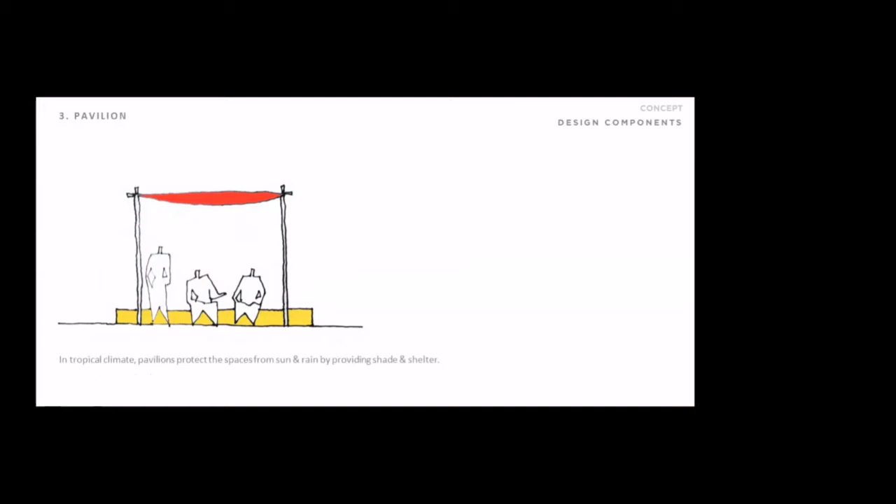Going ahead, there are certain amenities as well as certain principles that we formulated. One was the facility should be easy to use and convenient for all age groups. It should be durable and require less maintenance, meaning it should be easy to clean, with very minimum joints in the materials we use, because creating more seamless surfaces makes it easier for the cleaning staff to maintain the facilities.

The next is adaptability and the replicable nature of the unit. The designs should be adaptable to various spaces, because in such projects it's not like an individual house or bungalow where you're given a site with the luxury of setback areas. In cities you never know what kind of spaces you'll get to build in, so your designs have to be adaptable and at the same time replicable, and could be modified based on site conditions.

Then the fresh and soothing ambience, signage in braille for the specially abled. Care should be taken for the handicapped as well as the blind, so they can access the facilities.

And sixth, it should add value to the city. If you see around, most public toilets don't add value to the city. Whenever a public toilet comes up, that corner becomes like a no-go corner, or people neglect that space. But in fact it should happen the other way — the moment such a facility comes in, the space should get enhanced with a lot of these activities.

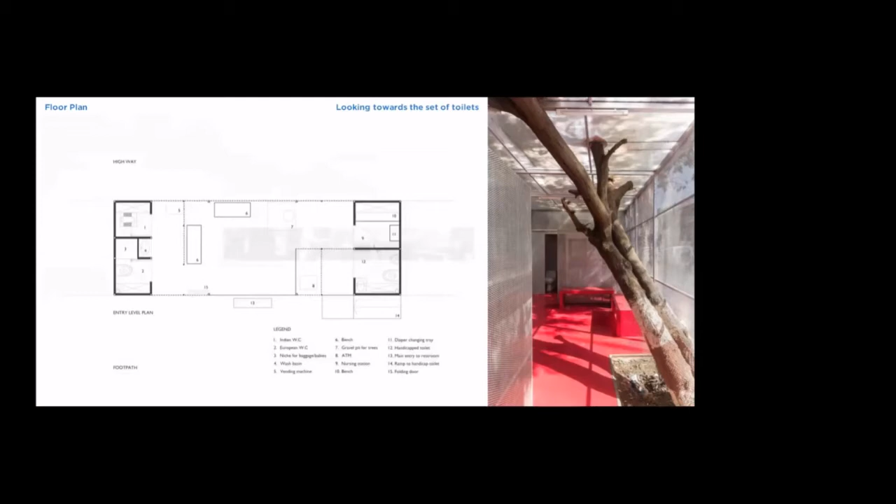For the methane gas, one has to run a pipe at the roof level because methane gas is combustible. It might be prone to some explosion if it's interacting at a human height level or a height lesser than that.

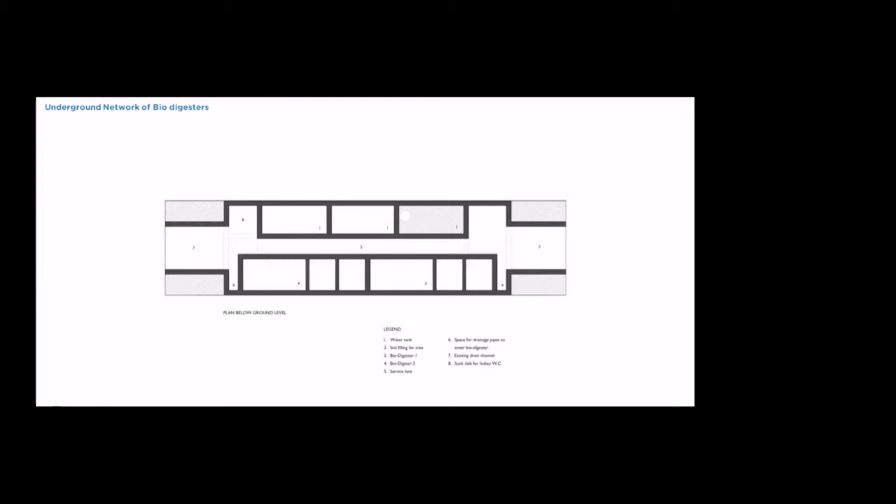This exercise was important because I spoke about optimizing the construction, because these projects are on a really tight budget, and we wanted to optimize each and every inch that we consider for building.

If you see this section, this study, what we have done is 7 feet 6 inches is where the height goes, where the hand of the guy reaches.

Then we have 2 options - one is 9 feet 6 inches and 10 feet 6 inches. We thought we should go with 9 feet 6 inches, so we get that 2 feet to place the water tank, and the top 1 foot we could save on because that was unnecessary.

I think everyone knows that famous Corbusier diagram with the Modulor scale - it's a very similar method of space optimization, but here we use the Indian human standards to really calculate the heights.

Then these are some images when the project got completed. In the section, you can understand the network of biodigesters below the ground. On the ground, we see the toilets on the left and the right, and the middle space becoming more like a breathable skin, which is the landscape.

To the left, we see the image which has the flooring in epoxy - actually it's not epoxy, it's polyurethane. We wanted a seamless flooring because, as I mentioned, maintenance has to be easy. So it's completely joint-free flooring, which allows the staff to clean it easily.

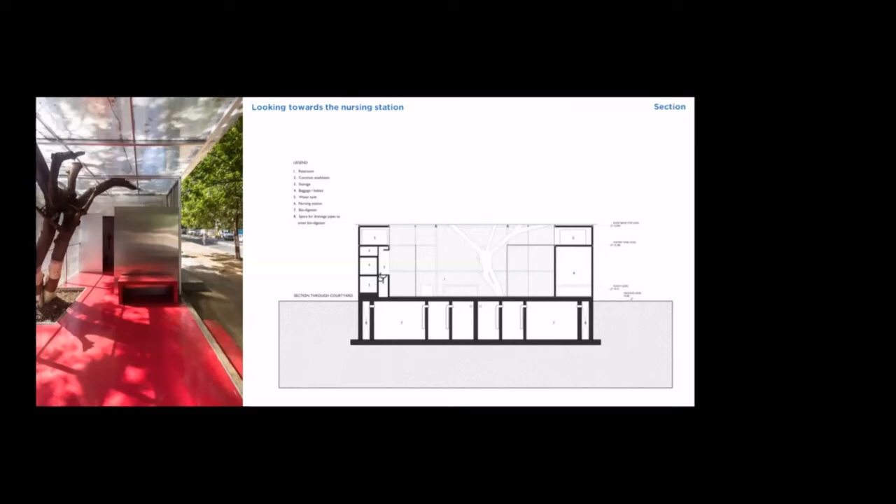And that is one of the images that shows the transparent skin and the landscape in the middle, so one can actually see the other side. One enters that space and still feels as if you're outdoors, not inside a complex. That's where this whole idea of minimal protection in tropical climate comes into play.

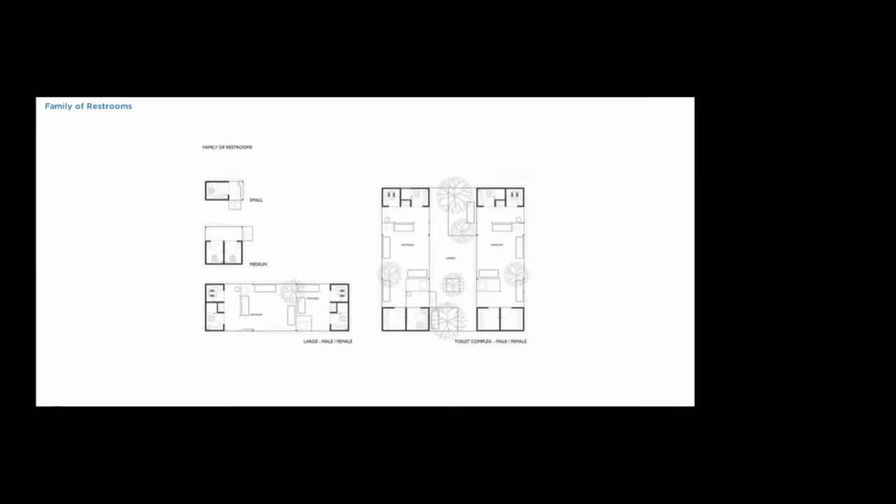So moving ahead, after this project, we got a chance to work on a project for the Western Railways at Bandra. This project we termed 'toilet in a courtyard.'

So here we worked with two principles. As a courtyard, we thought it would work best for two reasons. One is to contain the floating population for urinals—since it is next to a railway station, next to a platform, the floating population for urinals is very high, and we needed space where that population can wait before someone else finishes. Secondly, it forms an essential microclimate for daylight and ventilation, which again plays an important role. So we are again using the courtyard to do that—earlier we used perforated metal, this time we are using the courtyard.

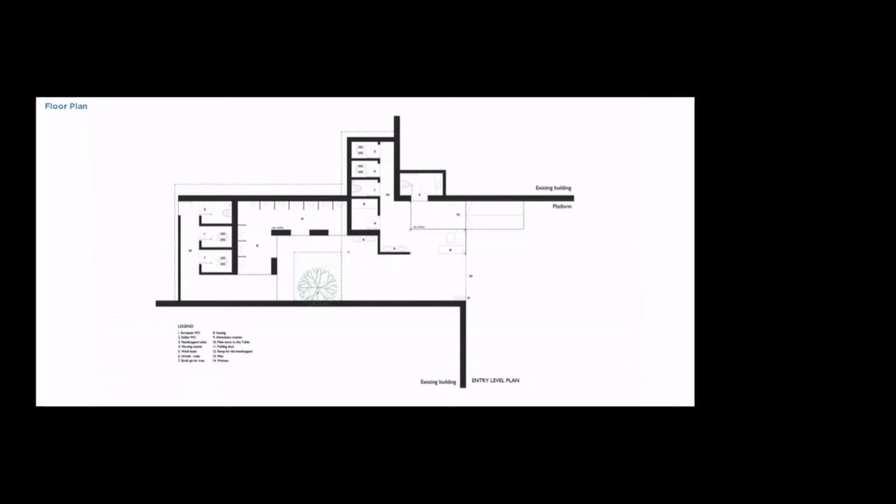And we have purposely kept it very close to the entrance so the women can quickly go in and out. You see the ramp that gives access to a handicap toilet. And then on the right hand side is the platform, so that is how it's connected to the platform.

And this photo is like we're standing inside the courtyard and looking towards the platform. So that is how the connection is. From the platform also one can see the courtyard and identify that there's some facility which is interesting.

Early mornings, a lot of kids were on the platform. They come in and sit in the courtyard, want to brush their teeth, etc.

But this is the material palette we dealt with. We had stone walls, polished concrete. This was on purpose because we wanted to relate this project to the concourse building of the Bandra station, which is built in the old Malad stone and tiled roof, etc.

And that's the passage to the male toilet. Again, we used perforated metal here, but in a different color so that it blends with the rustic material palette we were working with. So here we use perforated metal to screen different areas, but at the same time visual accessibility was maintained. This is the area for the handicap toilet, but it was important it is visually accessible, because in case the person on the wheelchair needs some assistance or any help, the attendant can quickly recognize it and maybe run for help.

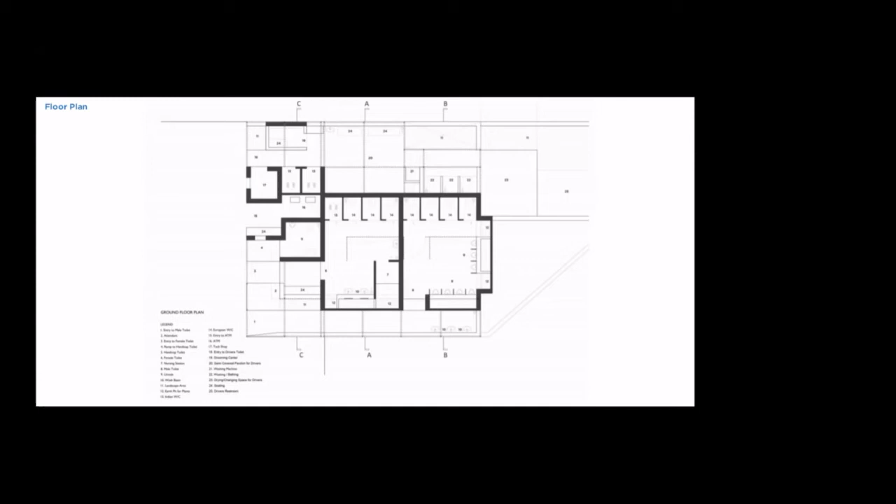Allows them to take rest, get fresh, and then move on to their journey. So this is how this facility looks like. Again, this has multiple entry points which give access to different facilities.

So the entry points right now you're looking at is entrance to the handicap. This is the entry to the handicap, then the women's toilet here, and then this passage goes all the way inside to the male toilet. And this is the Suvidha Kendra, which is for the truck drivers. And to the left-hand side, we have the access point for the truck drivers facilities. That is the section we worked with.

This image is the entry point for normal public, which has a very typical veranda kind of space, which is also very domestic, and which also works like a waiting area for the women. And that is the attendant seat where he sits and makes sure all the functioning is happening properly.

And the handicap access is right in the front, so the handicap people don't have to go all the way inside the complex, but rather stay right at the edge.

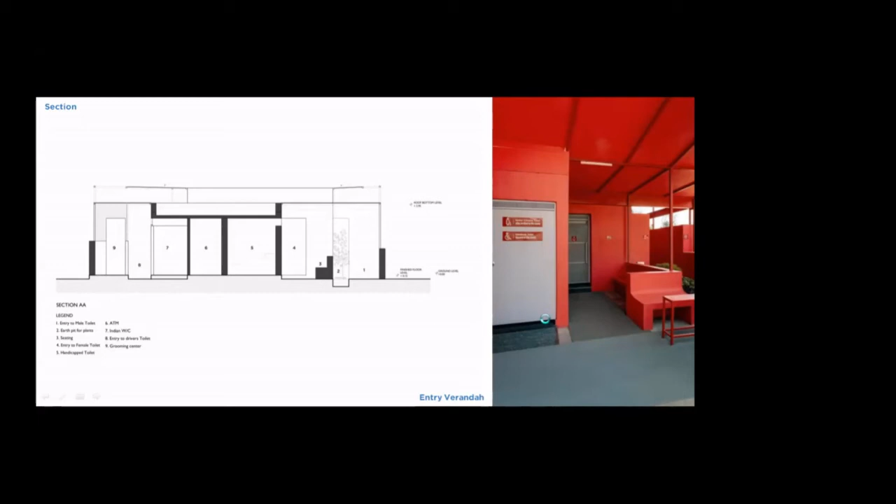That is inside the women's toilet. So here, like in the first project we used the perforated metal for light ventilation, and in the second project we used the courtyard. In this third project, it's a very interesting situation - it's not a courtyard, also not a skylight. It's something in between that opens to the roof, where we can grow plants and a lot of light can come inside.

This actually helps in drying the toilets faster, and also a lot of natural light inside makes the spaces feel very fresh.

These are the pictures that show the access towards the male toilet, and that's the toilet lobby, which has the wash basins and mirror, etc.

And that is inside the male toilet, so the same section repeats here. The wall just goes beyond the building line and opens out to the sky, where we could have plants and urinals. It's kind of an interesting experience that we want to create.

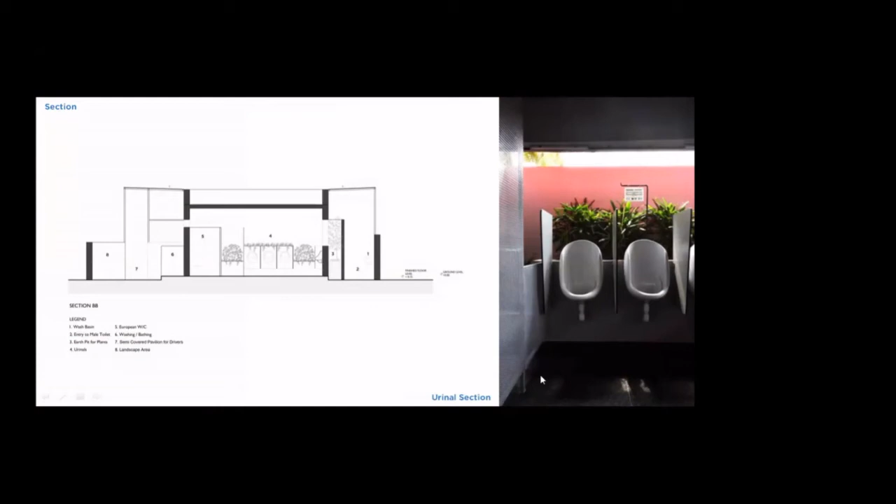I mean, experience-wise it's also very interesting, and it works logically too, since a lot of air and light comes in to dry the toilets faster. And also the light plays an important role.

These are some more images of how the light comes inside, and as the day changes, the light quality changes inside the spaces.

These are some more shots during the day where the sun is at different angles. In these images, one can really understand the freshness of the interior spaces, and I think that is very important in sanitation projects.

And these are the facilities for truck drivers. You can see the entry point where the truck drivers can enter, and right outside there is a tuck shop which sells water bottles and chips, etc.

These are the truck driver facilities, that's the grooming center. We did a lot of signages for this project, which was really important from a communication point of view. And then here also we played around with the trees.

All the trees are conserved and the beds are placed within the trees, so we purposely have these kind of beds so that the...

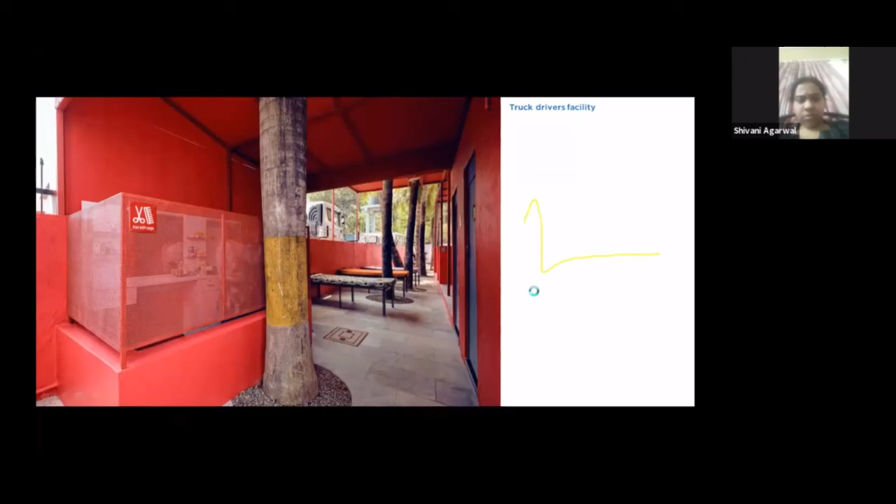So we purposely had these kind of beds so that the truck drivers feel comfortable while using these spaces, because those guys are constantly used to sitting on a charpoy whenever they go to a dhaba. And that's the grooming center.

That's the recreational area where all these guys are sitting and chit-chatting. There's also a television set that entertains them.

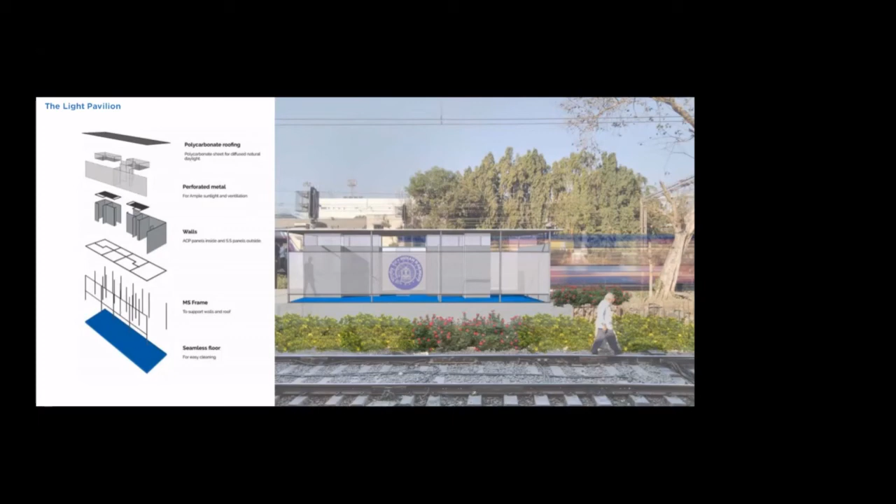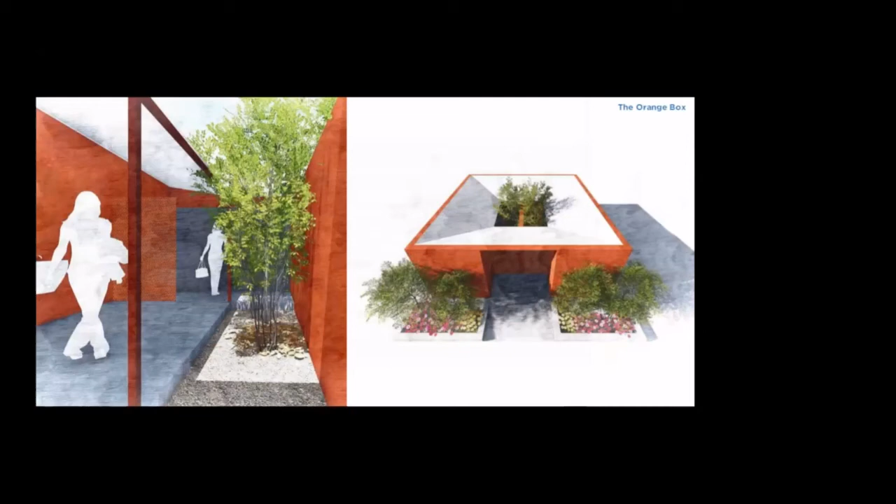This project is called Orange Box. We proposed this in Malkapur, which is like a small town, more like a village, and this facility is for the male and female crowd.

In the image on the right, you see a box which has a courtyard in the middle, and a wall in between that separates the male and female facilities. In the left-hand image, you see how the courtyard behaves, bringing in light and ventilation. A lot of principles we learned from the previous project we tried exploring through a different set of elements, so they don't repeat.

That's how we try to create variety in the design. Also here, color plays an important role, and since it's a village, every city or every village has a color of its own, that's what I feel, and that's where we start expressing those colors through this project. For example, Delhi has the color of sandstone, and likewise different cities have different colors.

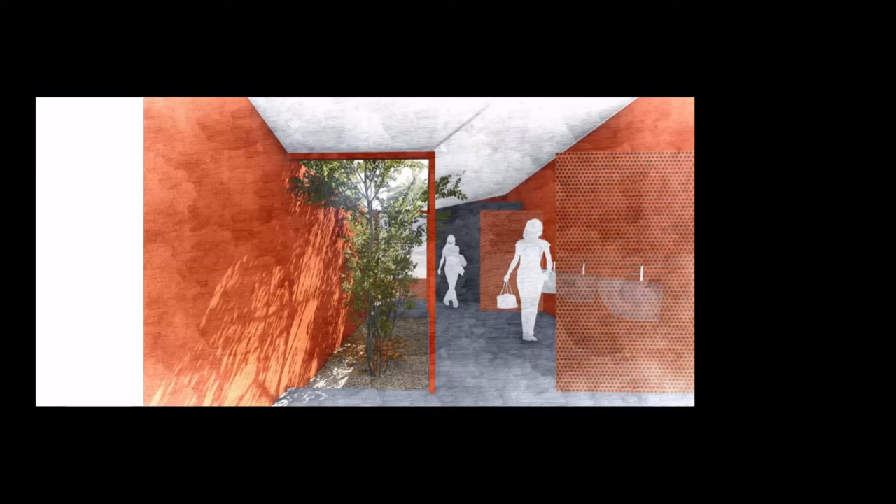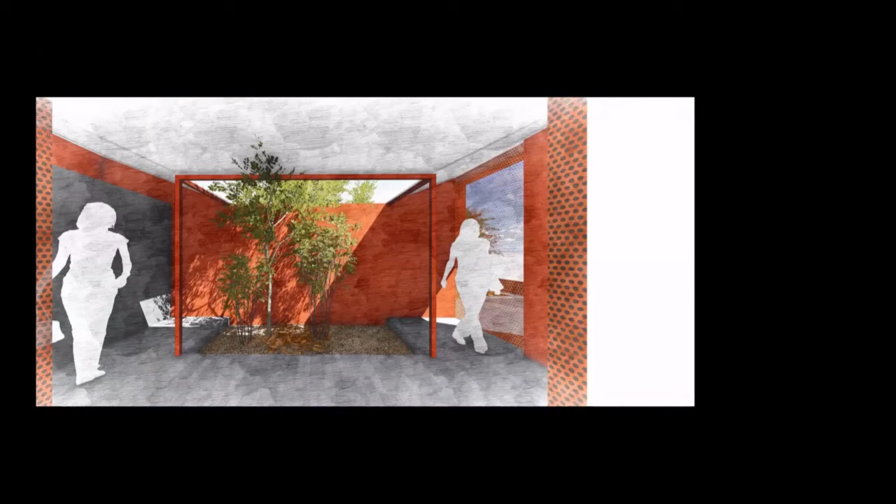It's a very small prototype, a very tight space, but again the use of courtyard, plants, light, perforated metal creates the ambience one requires inside the spaces. And how the urinals are placed, and where the screen and plants go, all these relationships are quite important, how you create them. It's just a matter of planning, you don't have to do rocket science to create a really good sanitation project, but certain important observations and principles you follow kind of solve the problem.

This is one important project we are currently involved in to an extent, the community sanitation program, in Calcutta. On the left-hand side you see a plan: it's a complex which has facilities for male toilets, female toilets, and in the corner there are spaces for bathing and washing clothes. Then there's a little reading room tucked in, and a tuck shop facing the road, which will essentially be selling products related to sanitation.

And the reading room is a component that allows one to interact with this complex, making this a livelier space. There are two pockets, spaces for males and females for resting or recreation, because these facilities could pop up anywhere in the city. For example, if it's near a school and a mother has to wait till school is finished, such spaces are very helpful for creating those instances where one can wait and pause.

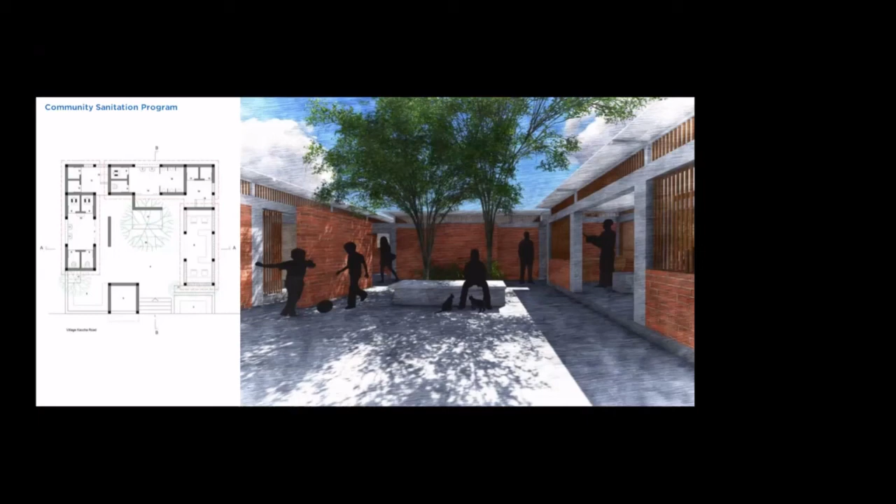We propose to build this in exposed brick because Calcutta gets really good quality bricks, and I think it makes sense to choose that material for construction. These are some renders that will give you insight into what those spaces are like.

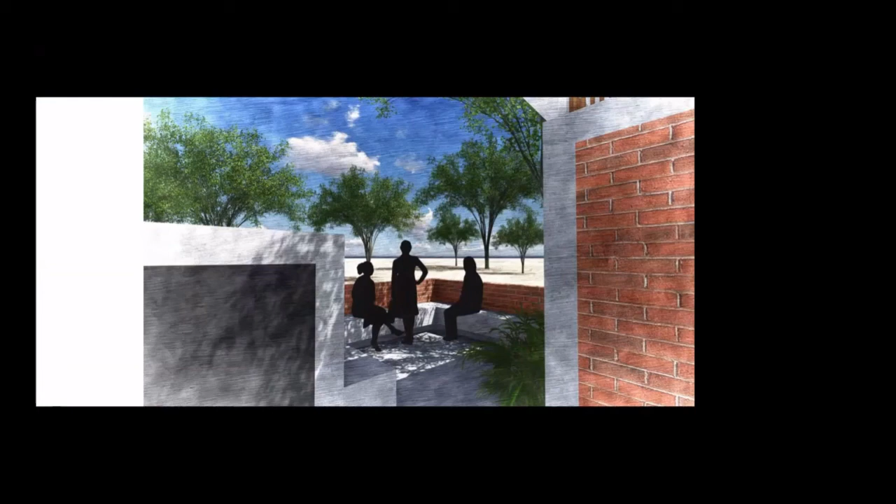So these are the spaces for women where they can hang out. We've purposely planned separate hangout spaces for men and women. If they want to interact, they can come into the main courtyard, but if they want to separate out, they can go in this corner, and the men can be on the right hand side of the steps.

Again, that central space allows for a variation of activities. Even during festivals and events, a lot of this space can transform into something. So it's interesting to see, though it is a community toilet, it has so much possibility to become something based on different events and different festivals.

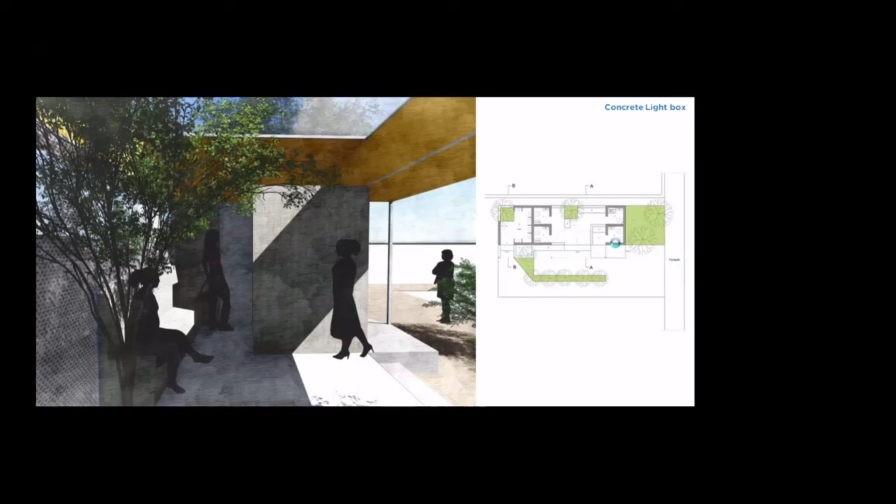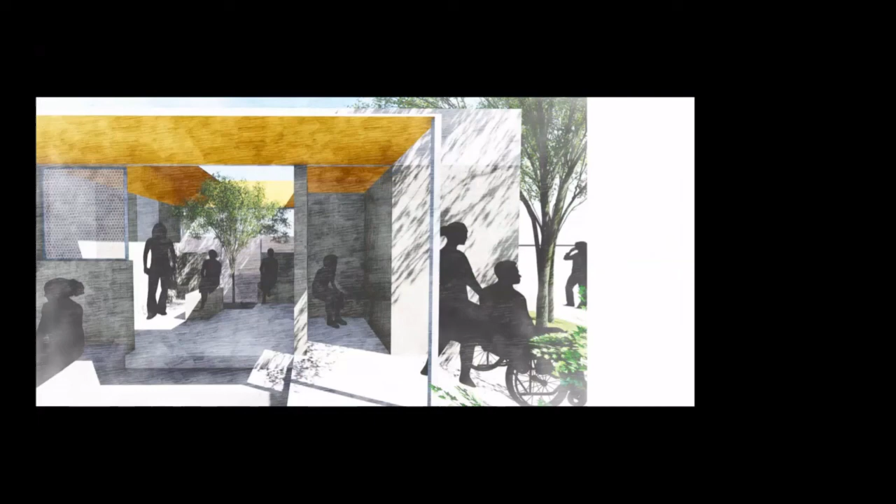So these are certain renders. Here we used yellow as the color just to express freshness, and our projects are more about color. Every project you will see has one or another color floating around; sometimes it's logical, and sometimes it's just for enhancing the visual aesthetics of the space.

That is how that center space looks, and the center is not open to sky; in fact it has a polycarbonate roof. But I think this render is a little misleading, showing a lot of sky. That space is actually rainproof.

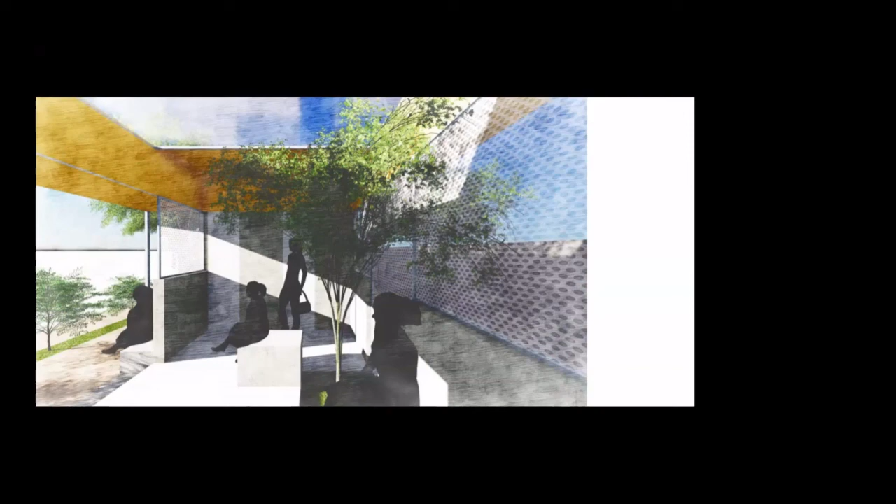These are certain very conceptual to very artistic looking renders that give you a hint into the space. That is how the male section is, again with a roof not open to sky but covered with a polycarbonate sheet, and a lot of light comes in.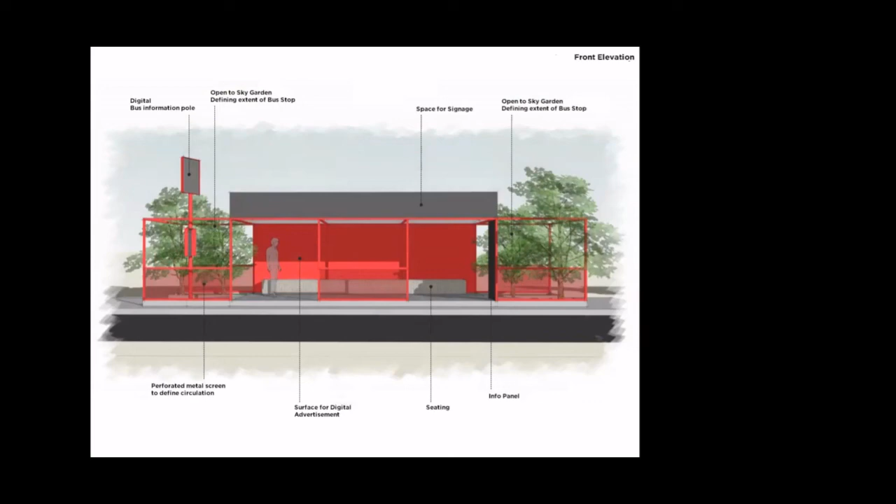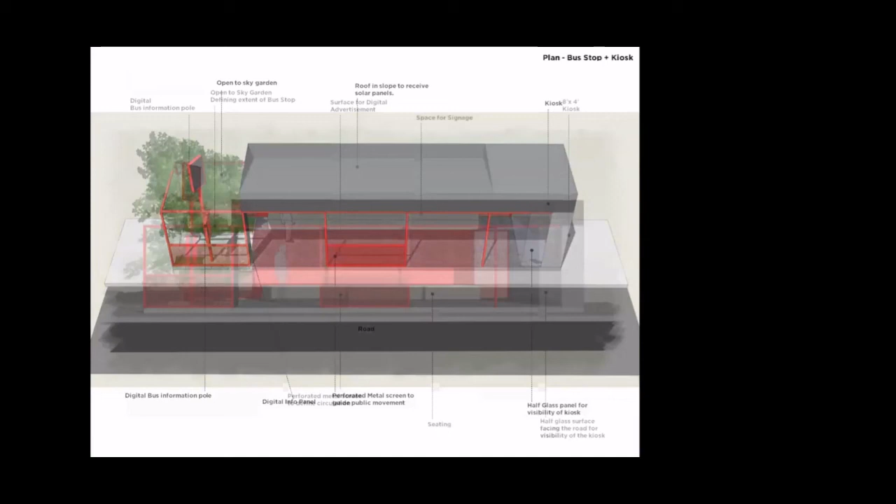That's the other module - bus stop and kiosk. The principles remain the same, but the facilities go on increasing. When it's just the bus stop there were gardens on either side, so one side gets converted into a kiosk and facility. This kiosk essentially means a water ATM or a normal ATM, and then we have a long concrete bench where one can sit.

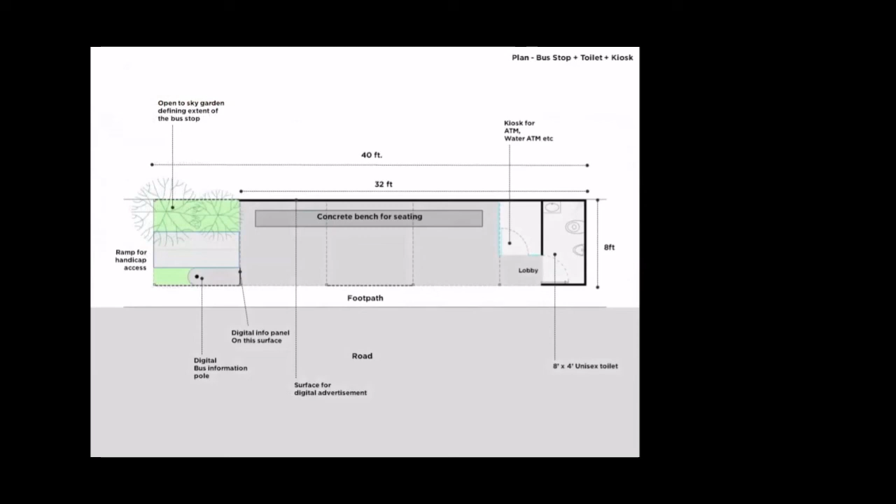That's how the prototype transforms from a bus stop into a bus stop and a kiosk, and as you move ahead we add a toilet. This project involved designing one master module and then adding different parts to it - the design principles stay the same, only the facilities increase and decrease. On the right hand side you see there's a kiosk and also a toilet, with a common lobby and things like that.

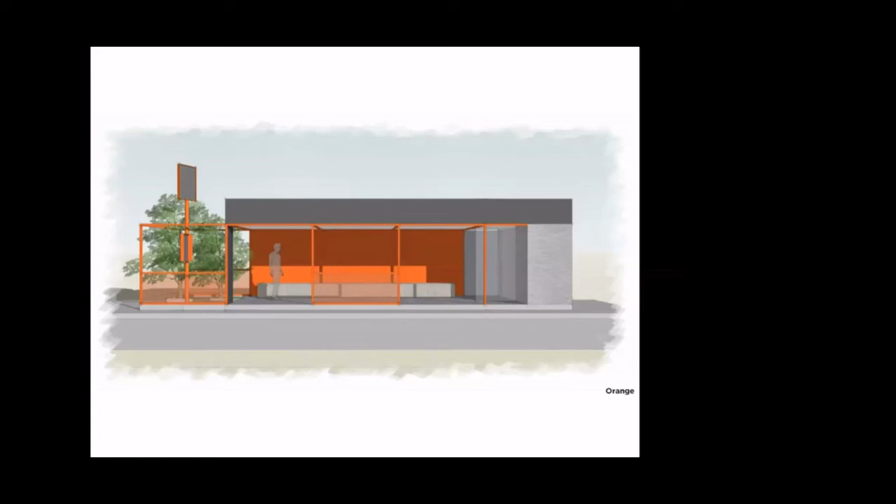So we did some variations - we are still working on this and yet to conclude on the colors, but just to show them we did different variations: one is a mud orange color, then a yellow orange, and maybe blue or pink. This is how that prototype looks like.

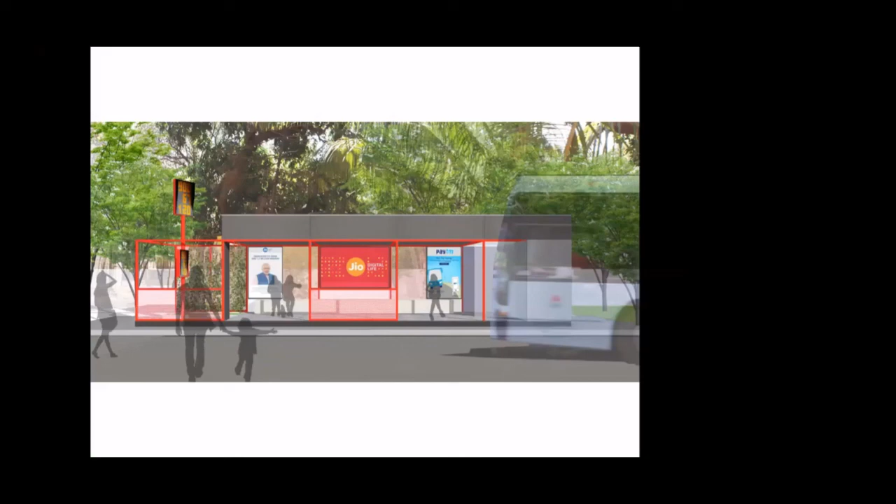This is closer to a realistic render, showing how it will appear with the landscape and a bus crossing by. So I think that's about all the projects we have done and are currently working on in public sanitation and infrastructure.